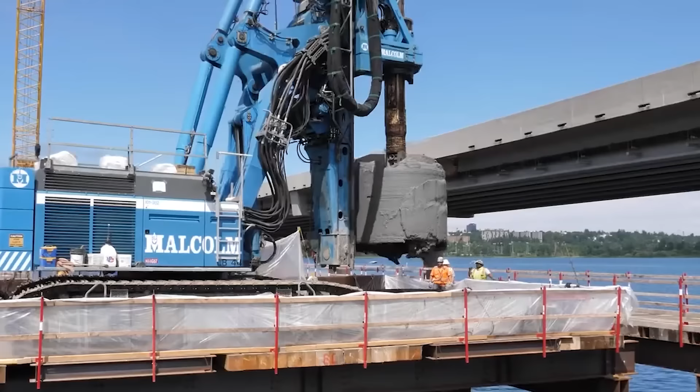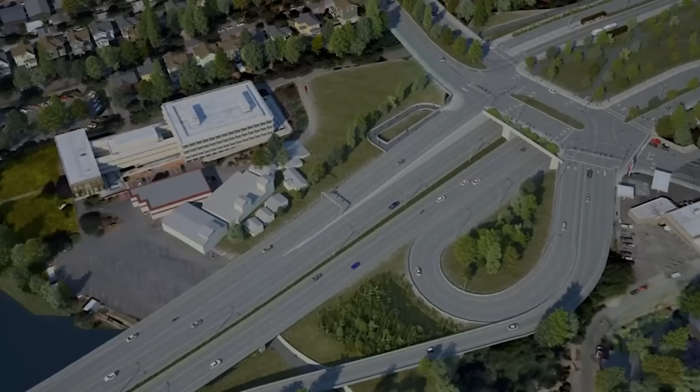But replacing the bridge was only the beginning. Interchanges, neighborhoods, and an entire corridor still had to be re-engineered. Now, as the final pieces fall into place, the full scale of this project is finally visible. Today, let's delve into Seattle's $5.7 billion SR 520 bridge replacement program.

State Route 520 is an east-west highway spanning Lake Washington. As an over-the-lake corridor, it connects the dense urban core of Seattle with Bellevue, Redmond, and the broader East Side, home to major employment centers, research campuses, and rapidly growing residential communities.

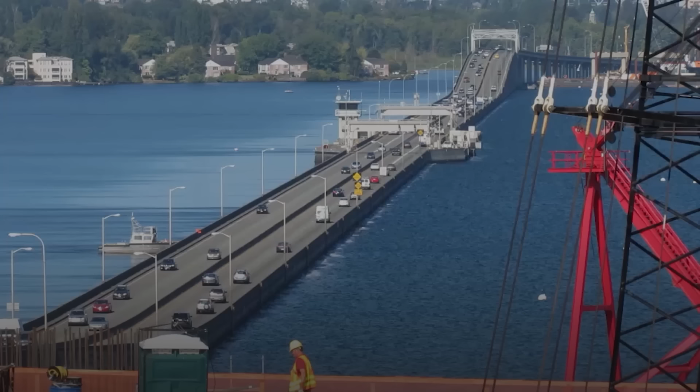While Interstate 90 provides an alternative crossing, SR 520 is essential for balancing regional traffic flows and supporting daily commuting patterns. When SR 520 slows or shuts down, congestion ripples outward across the entire metropolitan area. At the corridor's center is the Evergreen Point Floating Bridge across Lake Washington.

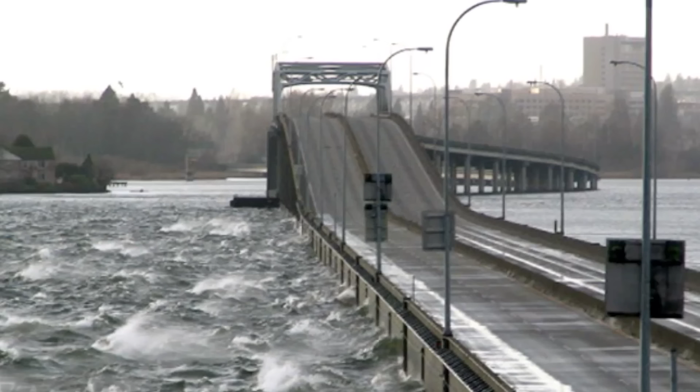Opened in 1963, spanning 7,578 feet, it was officially certified as the world's longest floating bridge. At the time, it was a bold engineering achievement. A floating bridge was chosen because Lake Washington is exceptionally deep and underlain by soft sediments, making traditional bridge piers impractical. Anchored concrete pontoons allowed engineers to create a stable roadway that rises and falls with the water.

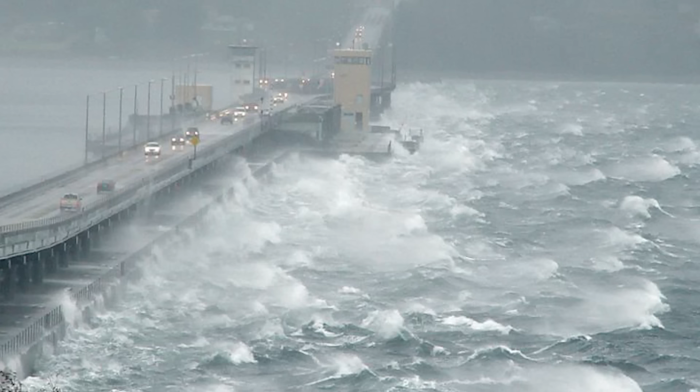For more than half a century, the bridge did its job. It held firm through storms, carried a growing region across deep water, and became a global benchmark for floating bridge engineering until time, traffic, and risk began to catch up.

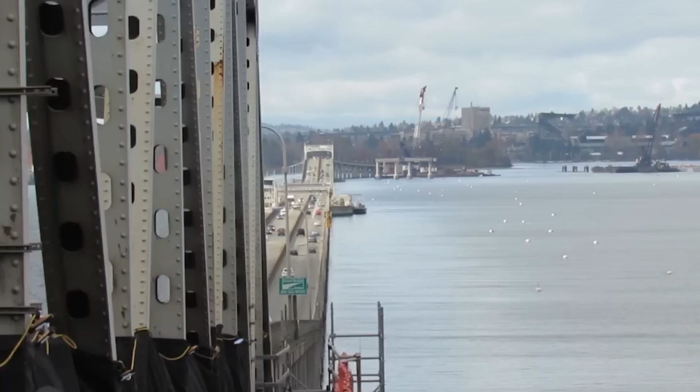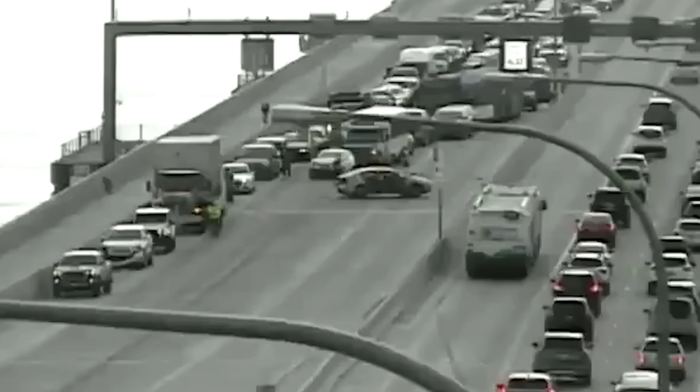Originally expected to carry about 17,000 vehicles a day, volumes climbed toward roughly 100,000 vehicles a day by the late 20th century, turning a vital crossing into a daily system risk. With no shoulders, even minor incidents could spiral into hours of congestion. As that pressure mounted, deeper vulnerabilities surfaced.

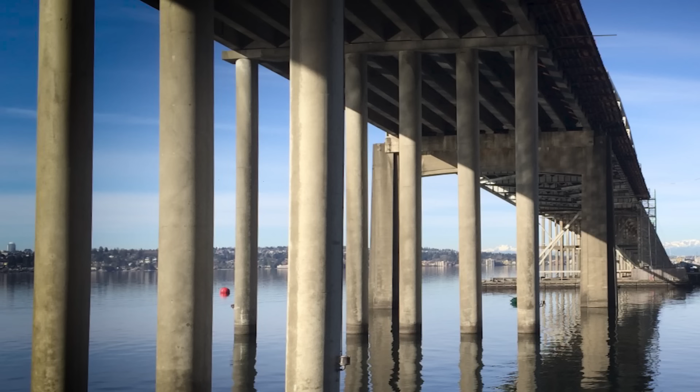Built before modern seismic standards, the bridge lacked the resilience expected in an earthquake-prone region. Storm damage and rising maintenance costs narrowed the margin for error, while seismic studies warned that a major earthquake could push the structure beyond recovery.

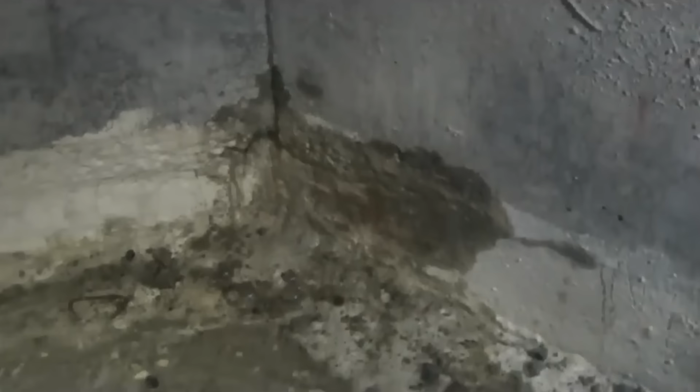By the early 2000s, repairing and retrofitting no longer made sense. Replacement became the only viable way to manage risk. The challenge was rebuilding a critical crossing without severing the lifeline the region relied on every day.

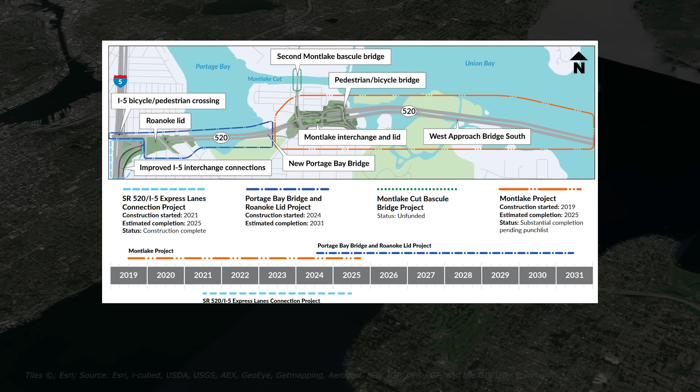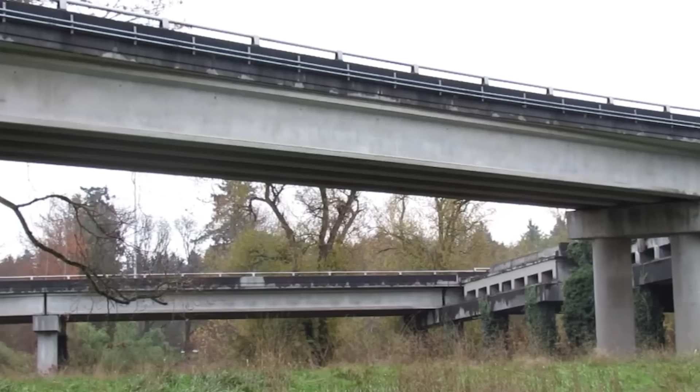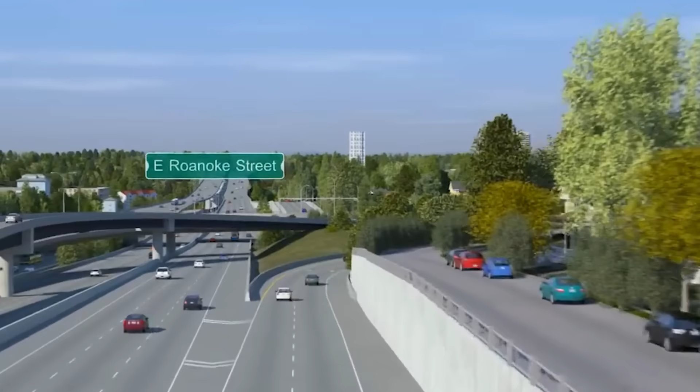What began as a plan to replace a single bridge quickly expanded into a comprehensive corridor transformation. Washington State Department of Transportation recognized that rebuilding only the floating bridge would leave outdated interchanges, congestion bottlenecks, and safety issues unresolved. The result was the SR 520 Bridge Replacement and High Occupancy Vehicle Program, a corridor-wide effort stretching from Seattle to Bellevue and reshaping nearly every aspect of the route.

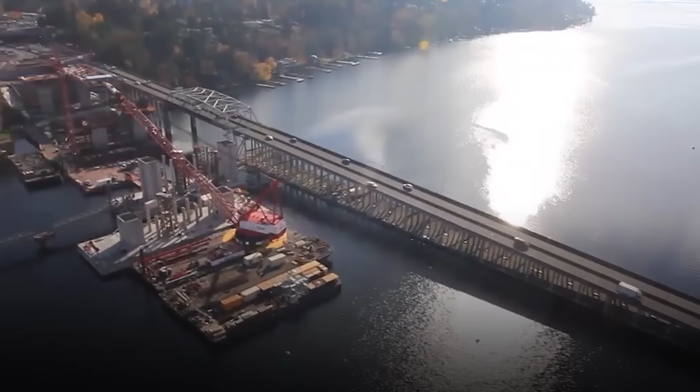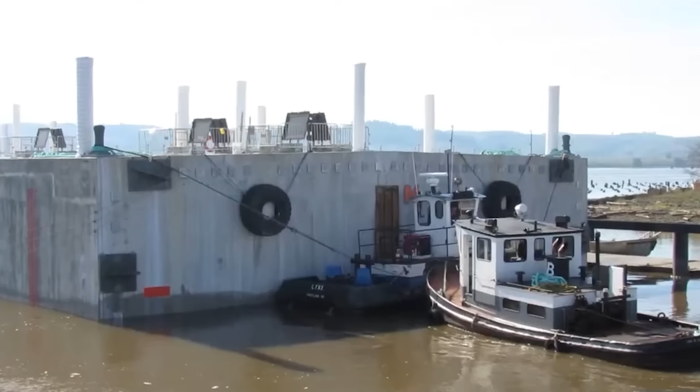At the heart of the program is the new Evergreen Point Floating Bridge, officially named the Governor Albert D. Rosellini Bridge. Constructed between 2012 and 2016 and opened to traffic in stages beginning in 2016, it replaced its record-holding predecessor with a slightly longer continuous floating span. The bridge stretches more than 7,710 feet across Lake Washington, supported by a fleet of massive concrete pontoons.

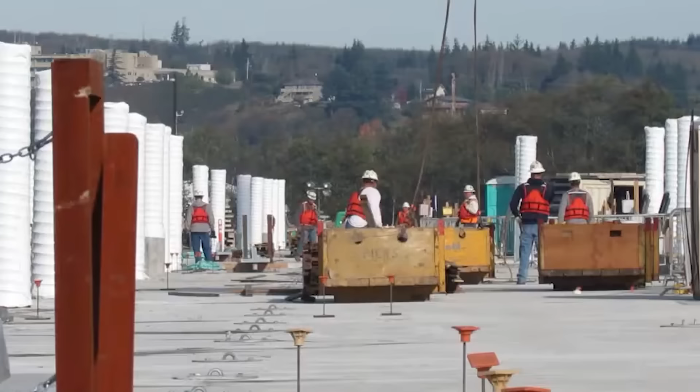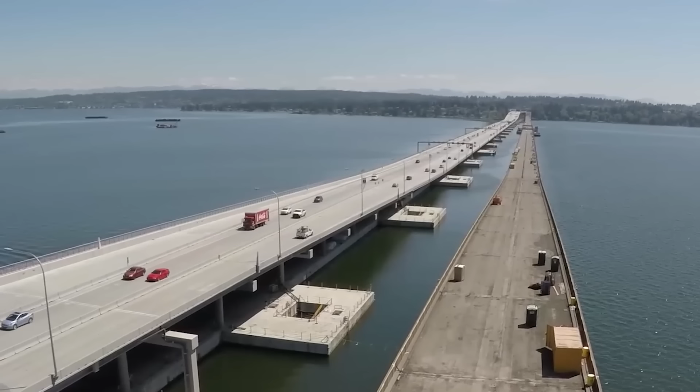Each pontoon was constructed off-site in controlled conditions, then floated into position and assembled on the lake, a process that required extraordinary precision. Unlike its predecessor, the new bridge was designed to move safely with waves and wind while remaining anchored against extreme forces. Advanced anchoring systems allow controlled flexibility, reducing stress during storms.

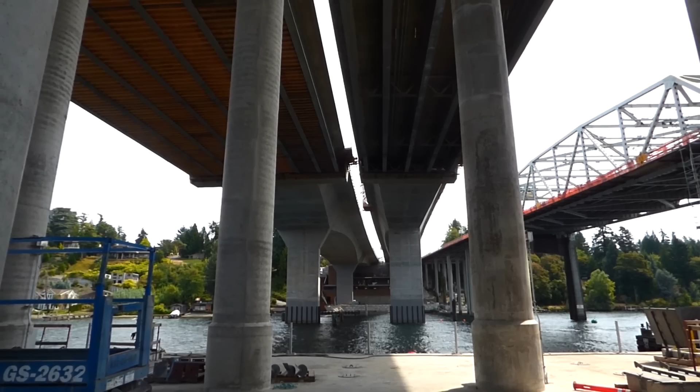The bridge also incorporates modern seismic design, enabling it to withstand significant earthquakes without collapsing. Full shoulders were added for the first time, dramatically improving safety and allowing disabled vehicles and emergency responders to operate without blocking traffic.

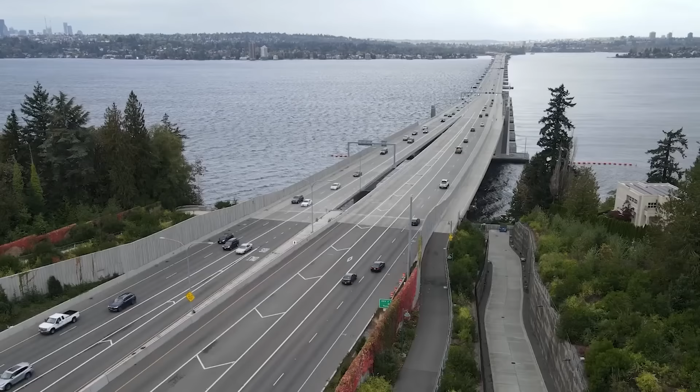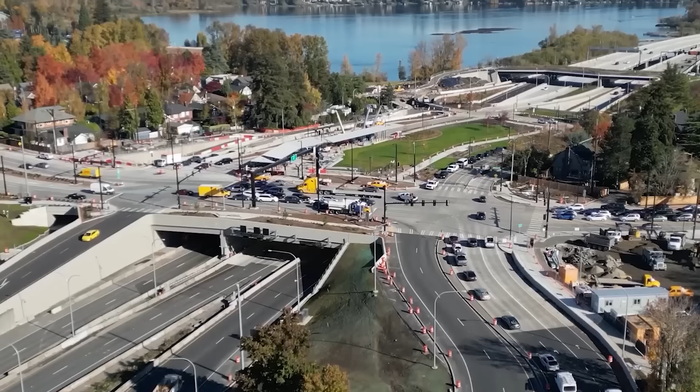Beyond the bridge itself, the program rebuilt major interchanges and approaches on both sides of the lake. In Seattle's Montlake neighborhood, one of the most complex urban construction zones in the region, engineers reconstructed the interchange to improve traffic flow and reduce conflict points.

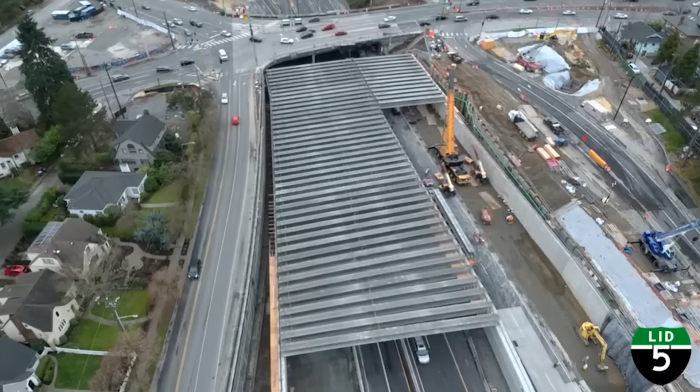To address decades of neighborhood division caused by highway expansion, landscaped lids were constructed over sections of the roadway. These lids restored local street connections, reduced noise, and created new public green space, turning what was once a barrier into a community asset.

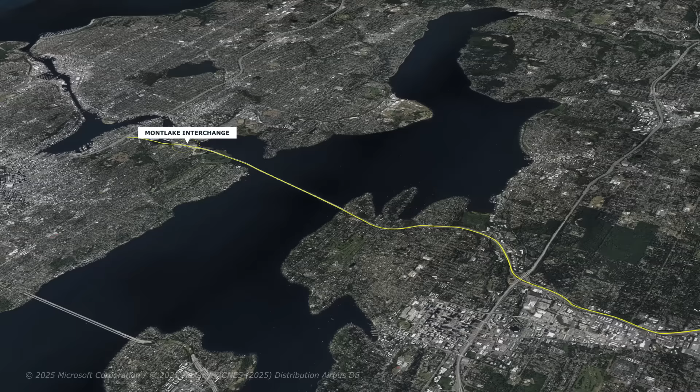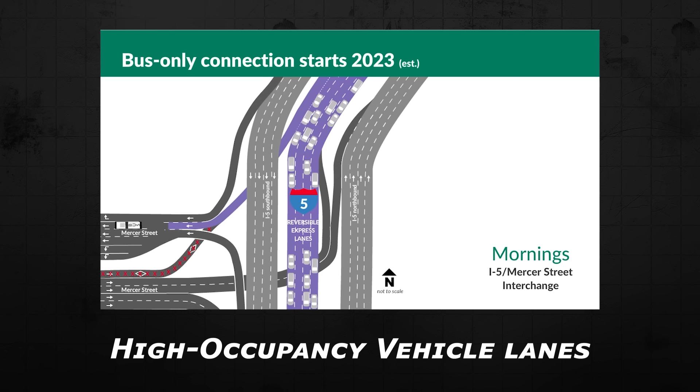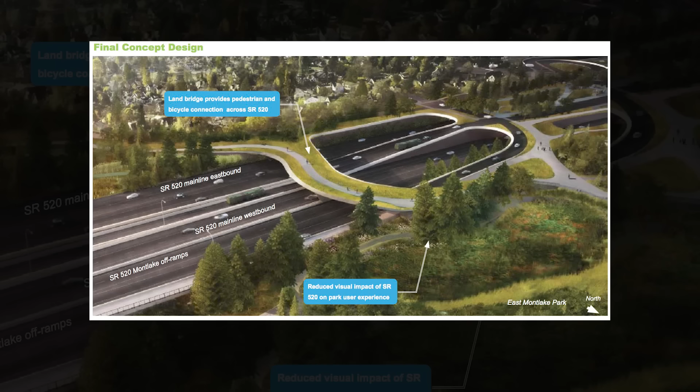On the east side of the lake, interchanges in Medina and Bellevue were redesigned to improve safety and capacity while minimizing impacts on surrounding neighborhoods. Throughout the corridor, new high-occupancy vehicle lanes were added to prioritize buses and carpools, improving travel reliability for high-occupancy vehicles and supporting regional transit goals. Pedestrian and bicycle facilities were integrated into the design, reflecting a shift away from car-only infrastructure toward multimodal mobility.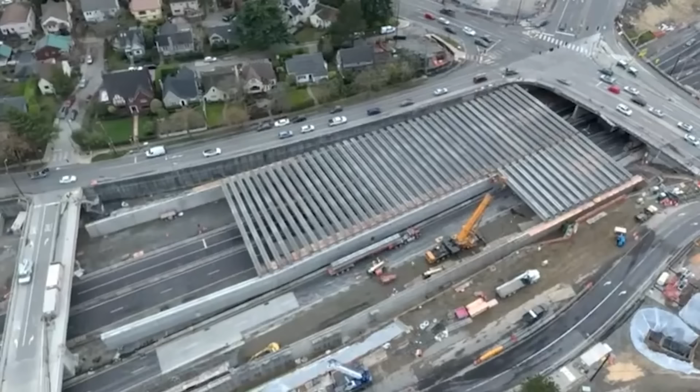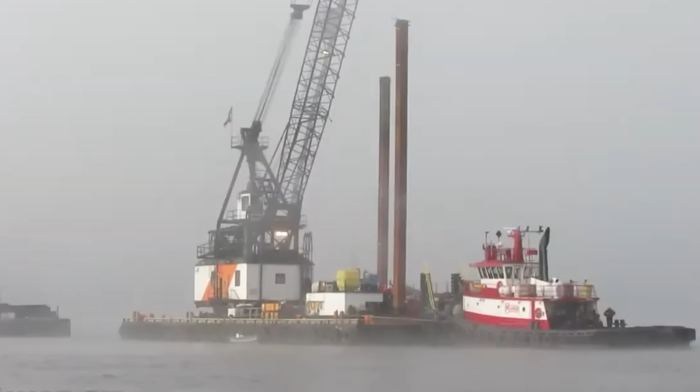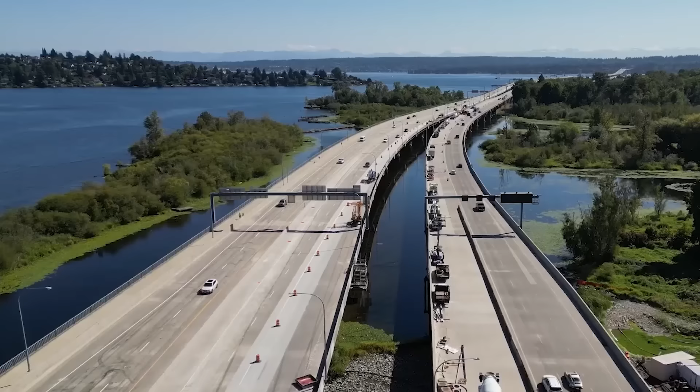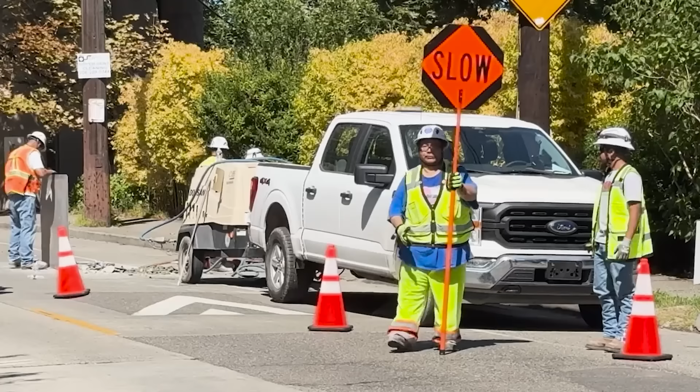Constructing all of this while keeping SR 520 open to traffic has been a feat in itself. Phased construction allowed traffic to shift gradually, minimizing full closures, while marine crews worked through challenging weather and narrow seasonal windows. Coordination between contractors, engineers, and transportation agencies has remained relentless, with safety and continuity as non-negotiable priorities. Much of the corridor is now complete and in daily use, but major West End elements, most notably the Portage Bay Bridge and Roanoke Lid, are still under construction, pushing the program toward its final phases.

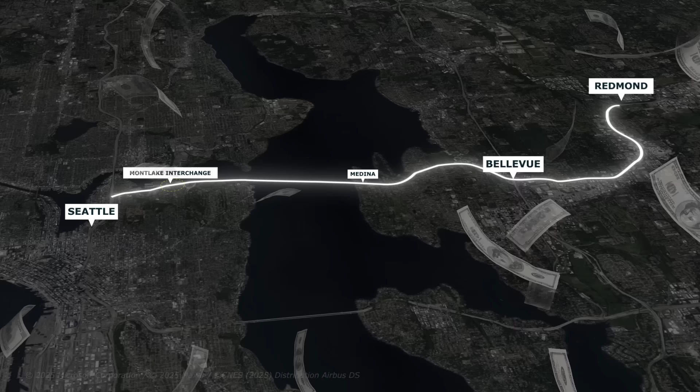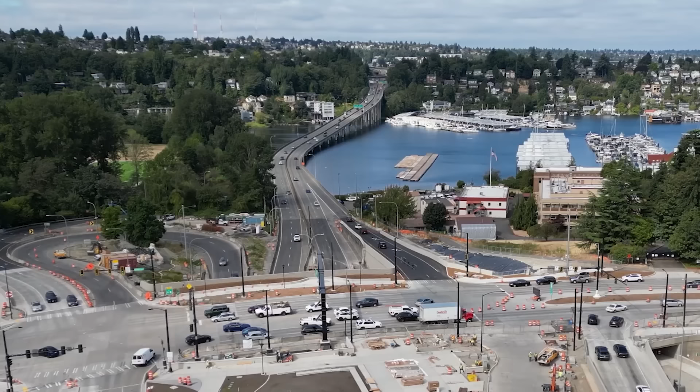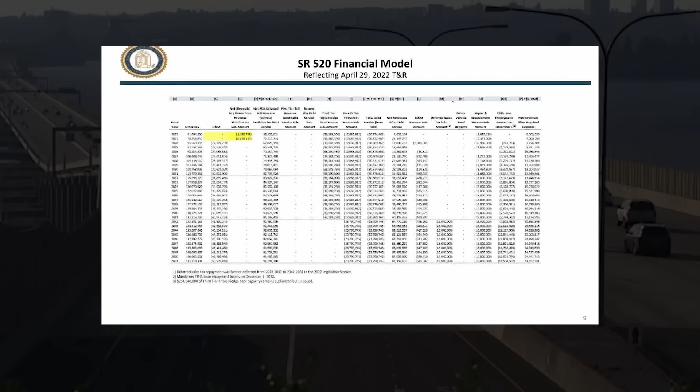The scale of the SR 520 program came with a price tag exceeding $5.7 billion, making it one of the most expensive transportation projects in Washington state history. Funding such an effort required a layered approach. State gas taxes and federal transportation funds provided a foundation, but they were not enough to cover the full cost. Tolling, therefore, became a central pillar of the financing strategy. Electronic tolls were introduced on SR 520 in 2011, both to generate long-term revenue and to manage peak hour demand on one of the region's most constrained crossings.

While tolling helped stabilize project funding, it also sparked sustained public debate. Critics argued that tolls disproportionately affected daily commuters, while supporters emphasized the necessity of user-based funding for infrastructure of this scale.

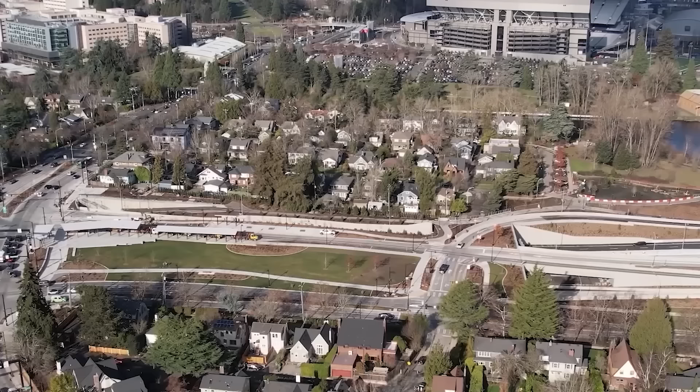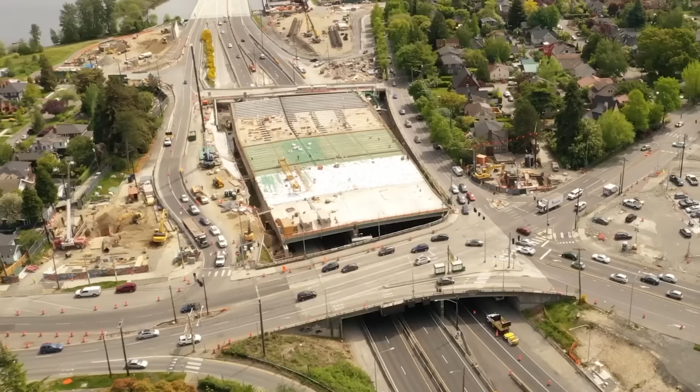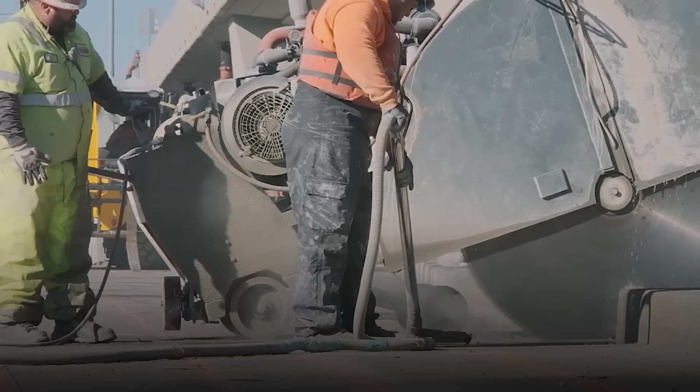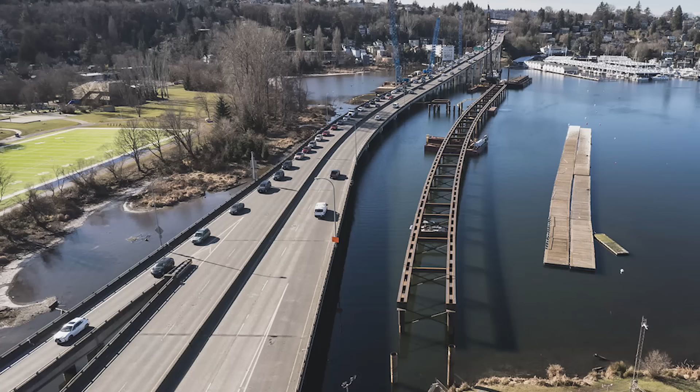The project timeline was deliberately phased. Construction began in the early 2010s, but rather than waiting for full completion, key elements were opened as they became ready. Traffic was permanently shifted onto the new floating bridge in April 2016, enabling demolition of the original 1963 bridge by 2017. Since then, work has continued on rebuilt interchanges, lids, and corridor connections. Major remaining West End projects, including the Portage Bay Bridge and Roanoke Lid, are now advancing toward an anticipated program completion around 2031, when the corridor finally functions as a unified, modern system rather than a sequence of temporary fixes.

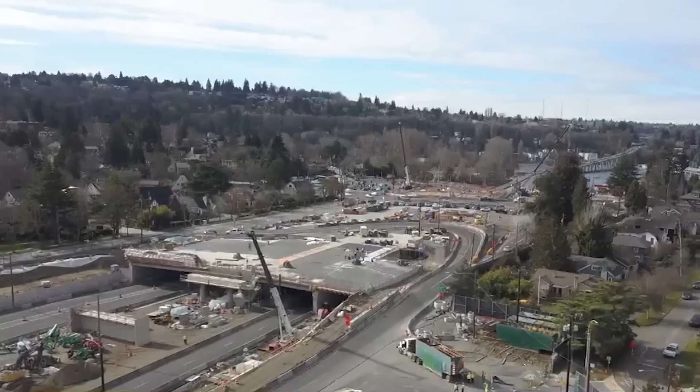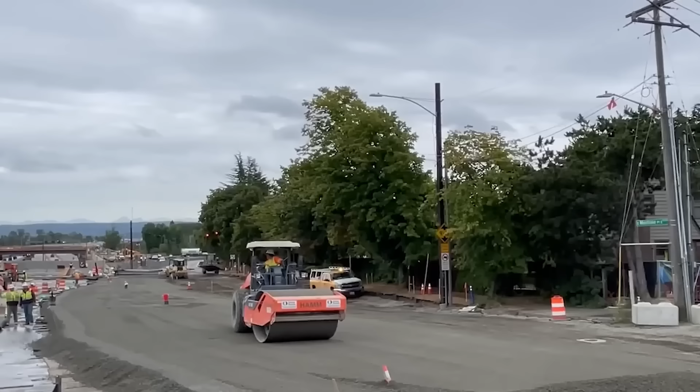Few megaprojects escape controversy, and SR 520 was no exception. Rising costs and schedule extensions drew scrutiny as the program expanded in scope, while tolling remained politically sensitive, fueling ongoing debates over equity and long-term affordability. Environmental considerations further shaped the project. Construction over Lake Washington required strict oversight to protect water quality and aquatic ecosystems, adding complexity and cost. Along the corridor, nearby neighborhoods endured years of noise, detours, and disruption, testing public patience.

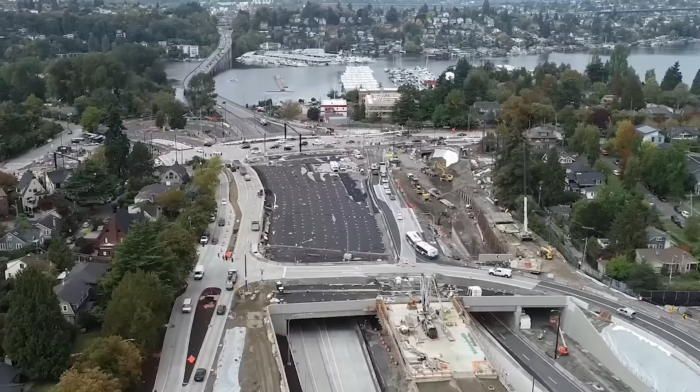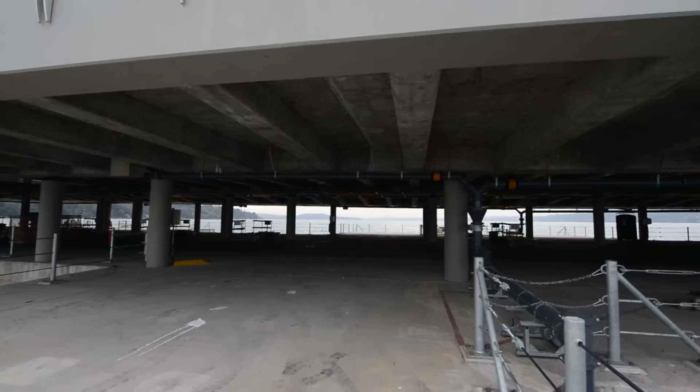Balancing engineering necessity with community trust proved difficult, and the project reignited broader debates over highway investment versus public transit, with critics questioning whether such a large roadway program aligned with long-term climate and sustainability goals. Despite the challenges, the benefits of the project are substantial. The new crossing is vastly more resilient to storms and earthquakes, reducing the risk of sudden failure. Safety improvements, including full shoulders and modern design standards, have transformed how incidents are handled on the bridge.

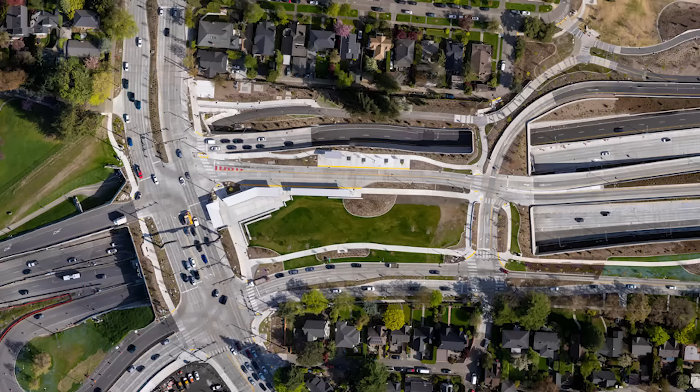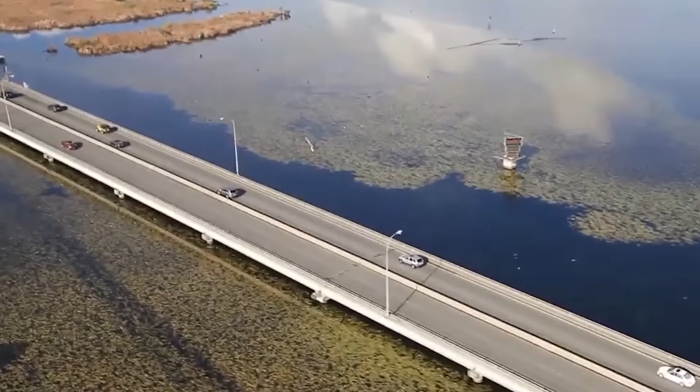HOV lanes and transit enhancements have improved reliability for buses and carpools, while pedestrian and bicycle facilities have expanded non-automobile options. Most visibly, landscaped lids reconnect neighborhoods long divided by infrastructure, reinforcing the project's broader legacy: long-term security for a critical corridor that supports economic activity, daily mobility, and emergency response across the region.

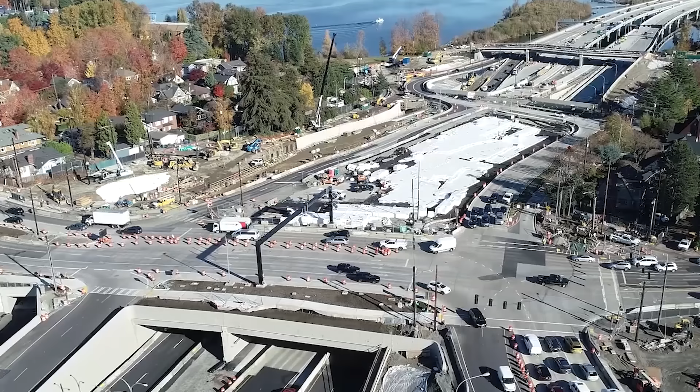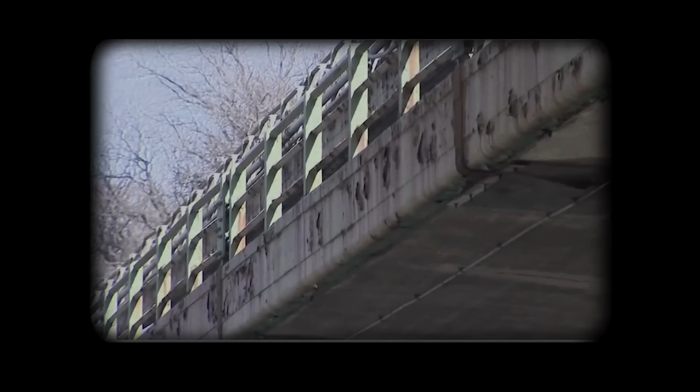The SR 520 Bridge Replacement and HOV program reflects a broader shift in how infrastructure is conceived in the 21st century. Climate change, seismic risk, and urban integration were not afterthoughts. They shaped every major design decision. As other regions confront aging bridges and vulnerable corridors, SR 520 offers both a model and a warning. Building resilient infrastructure is expensive, complex, and politically challenging, but delaying action only increases the risks.

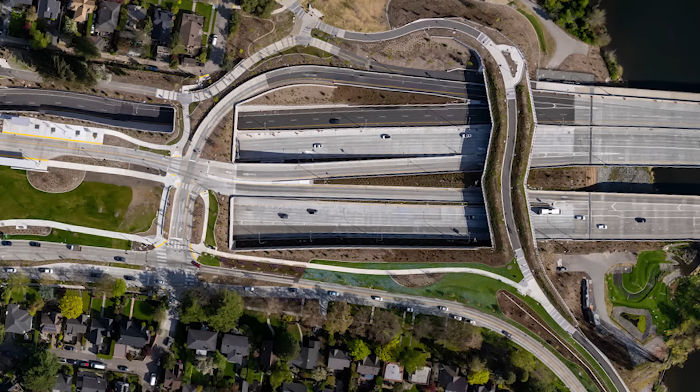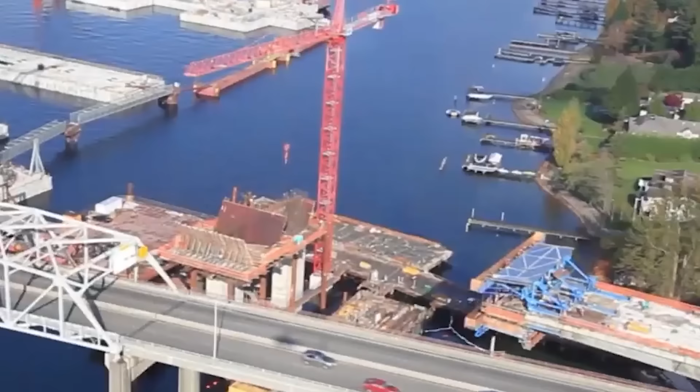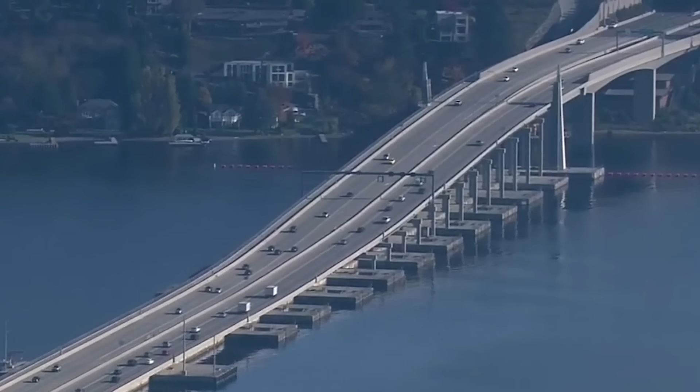As remaining phases are completed and the corridor settles into daily use, the legacy of SR 520 will extend far beyond Lake Washington. It stands as a reminder that infrastructure must evolve with the forces that test it. What began as a fragile 1960s gamble has been transformed into a crossing built for the next century, quietly carrying a region forward one day at a time.